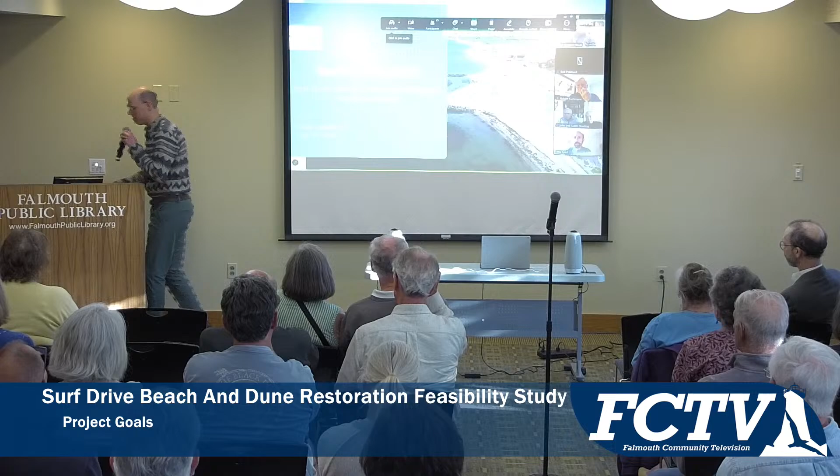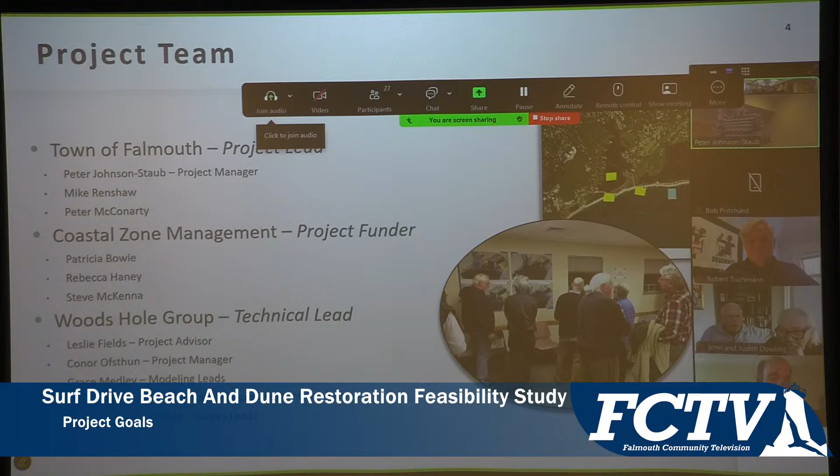I'm a coastal scientist at Woods Hole Group. We are here with the town and CZM. I will jump right into what our project team is. The Town of Falmouth is led by Peter Johnson-Staub for this project, so thank you for meeting with us regularly every other week for the past 8 months. We're also joined by Mike Renshaw, Town Manager, Peter McConarty of DPW, Josh Wrigley, Coastal Resiliency Specialist from the town, as well as others. Our funder is the Massachusetts Office of Coastal Zone Management.

We have representation from Rebecca Haney here today, so thank you, Rebecca, for coming. At the end of the presentation, you can direct questions to the whole of the project team if you like, but I'll take the first of it. And then with Woods Hole Group, I'm Conor Ofsthun, the project manager. I'm joined here by Leslie Fields, the project advisor. We might have a couple other staff coming in and out.

So this is the Surf Drive Beach and Dune Nourishment Feasibility Study. What is beach and dune nourishment? Beach nourishment is bringing in sand, gravel, sometimes cobble, just bringing sediment to the beach to build its volume, to build it wider, to build it higher, to improve the habitat, to improve the protection that it might bring in the face of storms. The same essentially goes for dune restoration.

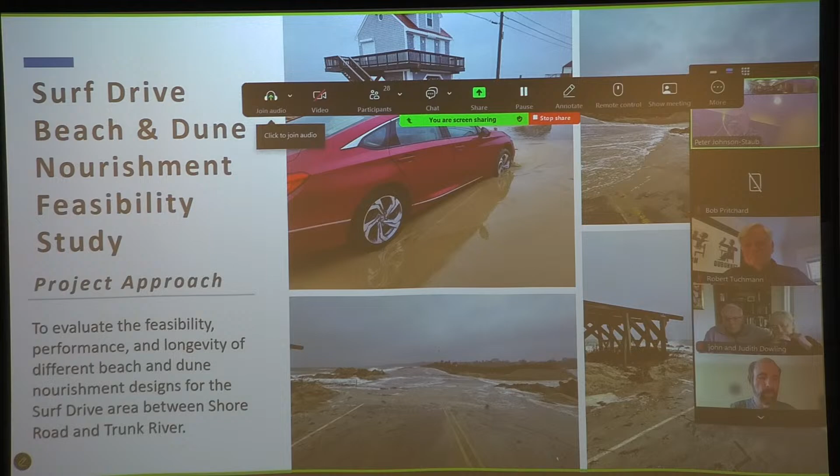Dune restoration is bringing in sediment compatible with dunes to build slopes, to attain certain crest elevations that can build a dune that both provides the habitat that a dune can provide, but also provides the storm buffer that it can provide to assets on the landward side, in this case, Surf Drive. So we're looking at beach and dune nourishment and evaluating its feasibility. What that means is we're going to evaluate, can we build this?

We're looking at all of the different constraints of the site, the topography, the wetlands, the eelgrass, the flood risk. We're also looking at the performance of a design. So we've done some modeling that I'll present here. If we design a beach or dune nourishment project, can it stand up to storms of some level? What is the longevity? And then we're also looking at feasibility from the lens of engineering and permitting.

You know, what does the design look like? What do the regulators think of this? Does this pass the Wetlands Protection Act? I've also got some slides here on cost as well. So those are all the aspects of feasibility that we'll be looking at.

The intended outcomes of the project, so what we were striving for in any sort of design, are threefold. The first, why we're here, is we're trying to combat beach and dune erosion. We're trying to reduce wave overtopping. That picture there on the right-hand side was from January 2024, and it's just a perfect example of what we're trying to prevent happening to Surf Drive, or at least reduce the risk of happening.

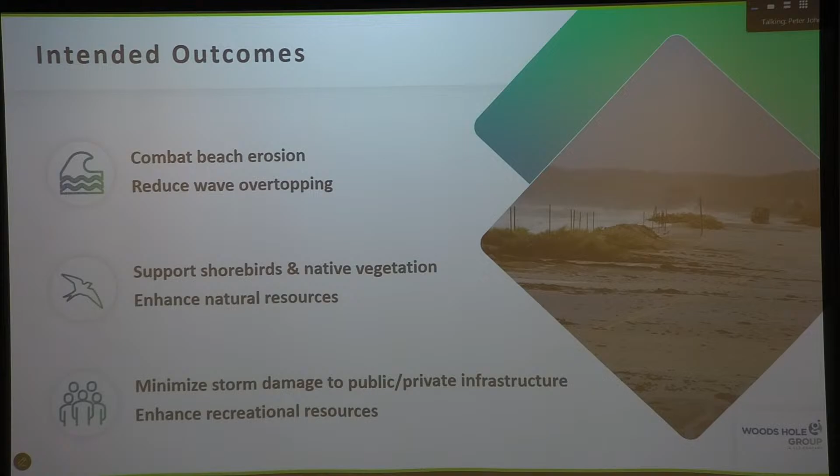So oftentimes a storm will come, it will wash over the beach, over the dunes, and carry sand into the roadway that needs to be maintained by DPW. Sometimes the roadway may be undermined.

Underneath the roadway are utilities that can become vulnerable. And there's also the loss of beach habitat and the loss of beach recreation that comes with that erosion. But additionally, we want to support shorebirds and native vegetation. There's a lot of very valuable natural resources here.

The beach and dune of Surf Drive are kind of a staple in the town of Falmouth. This is the longest part of their shoreline, and that natural resource is really important. There's also recreational resources. There's public beach, there's private beach, there's many ways for people to access this coastline. There's the roadway itself, which provides great views. So we want to understand all of those kind of mechanisms.

So I'll quickly go through kind of how we got here. Many of you may have been part of the planning processes in the past. There are a few reports. There's a climate change vulnerability assessment for the whole town of Falmouth. That climate change vulnerability assessment found Surf Drive to be especially vulnerable and especially critical to the town.

So they then did a coastal resiliency report, looking at Surf Drive and really understanding what's at risk, looking at erosion, looking at flooding, inventorying all the assets, and trying to develop, kind of from a grand scheme of things, what are we going to do? Because there are significant coastal hazards here.

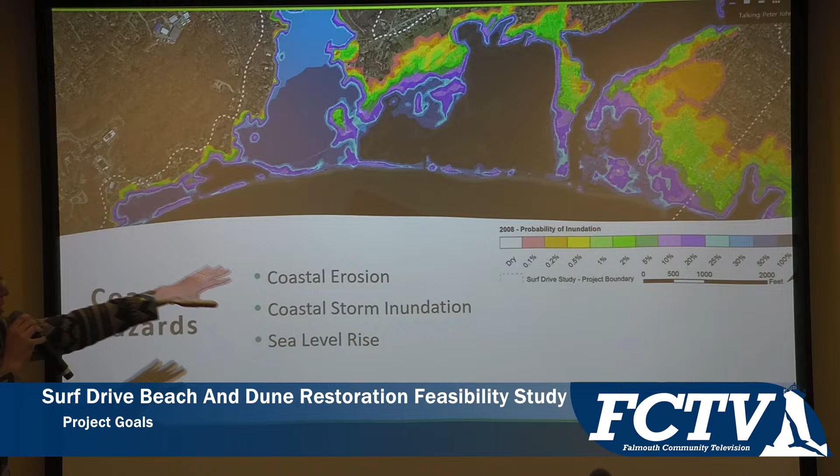This map here on the top is showing the probability of flooding on an annual basis in 2008. Since 2008, there has been some degree of sea level rise, so these are almost even old projections at this point. We have future projections as well that I'm happy to talk to. But in 2008, the road is expected to flood even once a year. Any area that is covered in dark blue has a 100% annual chance of flooding. So the condition has been severe for some time.

For decades, Falmouth has been managing their sediment, managing their roadways, and having to deal with these issues. With sea level rise, all of these issues are expected to worsen. Sea level rise is really only going in one direction, and those higher water levels are going to bring high tide flooding at some point. They're going to bring higher level storms, more surge, more overtopping of the roadway.

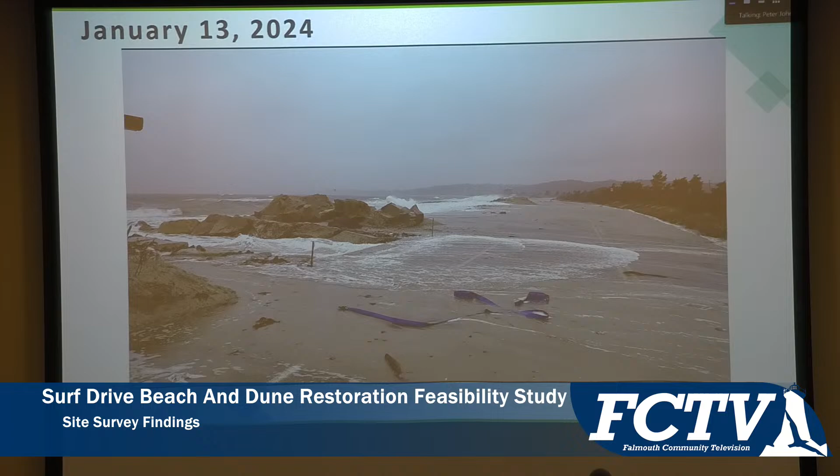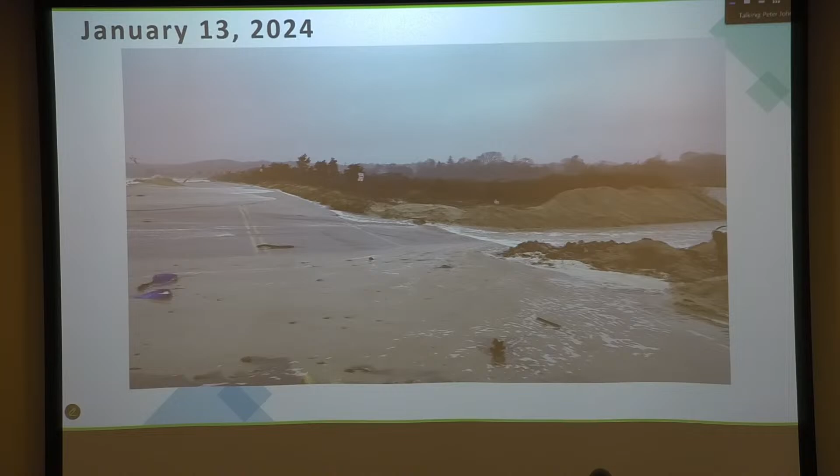So this is a video just to give a brief picture of what can happen when a storm hits Surf Drive. We're pictured here right at the edge of Salt Pond. That's the inlet there. Waves are rushing up and over the beach and flooding into Salt Pond. There's lots of sand being washed all over the place. There's some debris. And this is a storm on January 13th that, in the scheme of things, was not a very large storm.

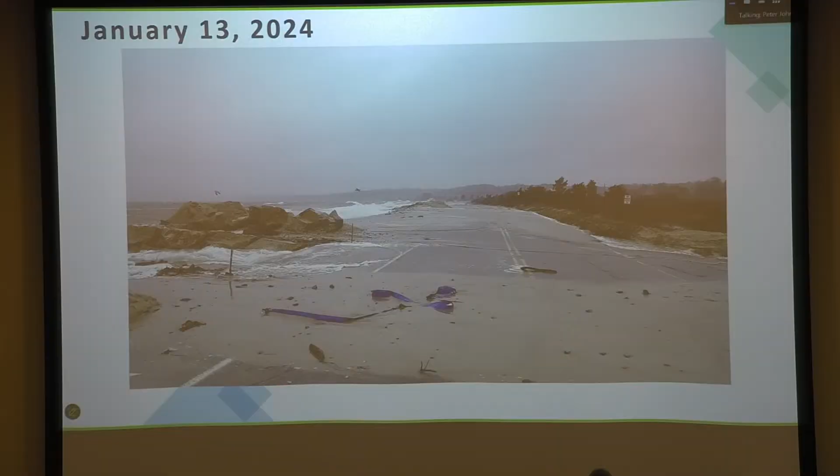So comparing that January 13th storm, the water level amounted to about a 4-year, 5-year storm. So we can expect that water level to occur every 4 or 5 years. That is January 2024, pictured on the far right there. And it amounts to about a half foot less than Hurricane Sandy, about a foot and a half less than Hurricane Bob, far less than Hurricane Carol or the 1938 hurricanes, which washed over these beaches.

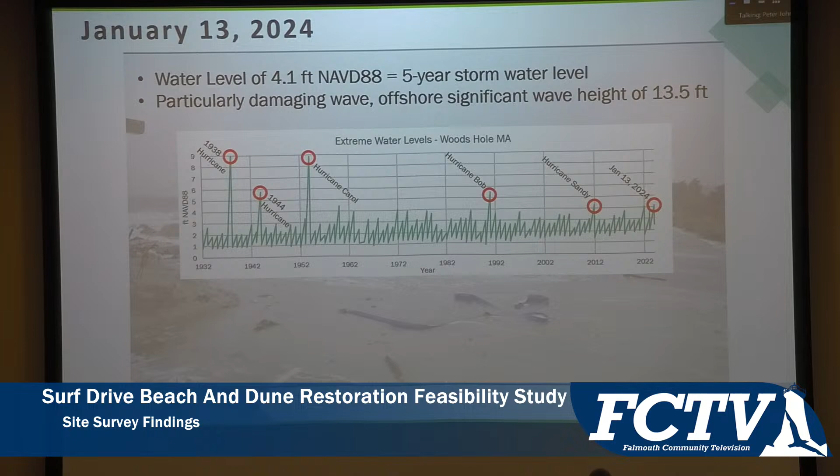This was a particularly damaging event because the significant wave height was high, especially off in Buzzards Bay and other areas. It really depends storm by storm what areas of the beach are affected, what towns get affected most. There were large waves, but they didn't coincide exactly with the high tide or the peak of the storm surge water level. So this storm could have been worse than it was, but in any case, what was a 4 to 5 year storm amounted to a significant amount of damage to the roadway.

So just quickly, those past studies that I've mentioned, there's the climate change vulnerability assessment and the coastal resiliency planning report for Surf Drive. These are all available on the town's website. Out of that came a management pathway. This is a simplified version of it here, but it's essentially saying that in the near term, the town of Falmouth, through a public outreach process, came to the conclusion that beach and dune restoration is their priority to try to do right now.

This is maybe the lowest hanging fruit, the easiest way to try to build up the barrier beach. We're working here on a barrier beach. That means we are on shifting sands at all times, and the erosion that's happening, the first fix to that is, well, we might need more sand. So beach and dune restoration is what's looked at first.

At the same time, DPW continues to maintain the roadway. Public outreach is ongoing. But in the long term, with sea level rise, it's going to become someday untenable to maintain Surf Drive. The beach itself may be able to stick around, and I'll talk a little bit more about that. But the infrastructure that's there and planting our flag at the edge of the ocean is going to be increasingly difficult to maintain.

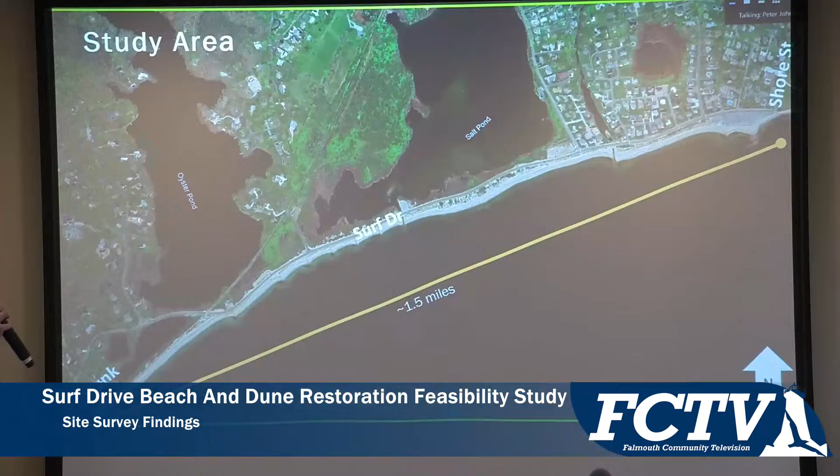I'll quickly go over just some of our survey results. So our project reach is from Trunk River in the southwest to Shore Street in the east. It's about a 1.5 mile reach. We cover the Shining Sea Bikeway to some extent, the transition to Surf Drive and Elm Road and Mills Ave, the public beach itself. So we're looking along this whole reach that has varying conditions. So we wanted to map out those varying conditions.

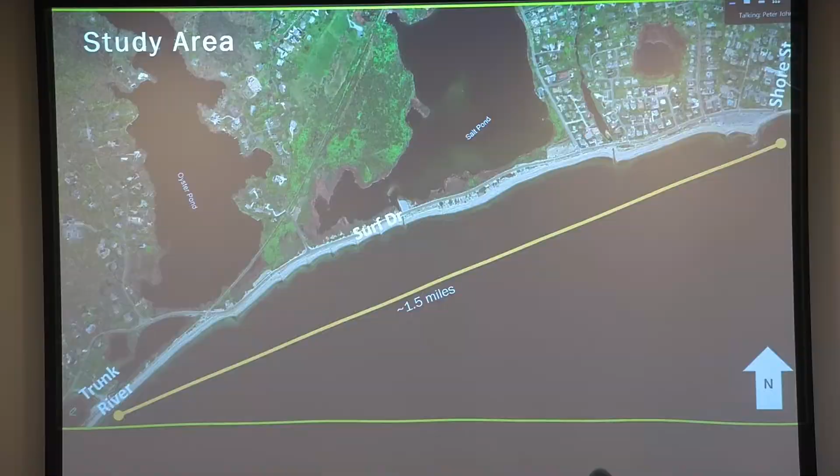We did a wetland resource delineation. We did a topographic survey. We did an eelgrass survey. We sampled sediment. We mapped all of the infrastructure, edge of road, all the buildings and jetties and so forth, all to set the baseline for analysis.

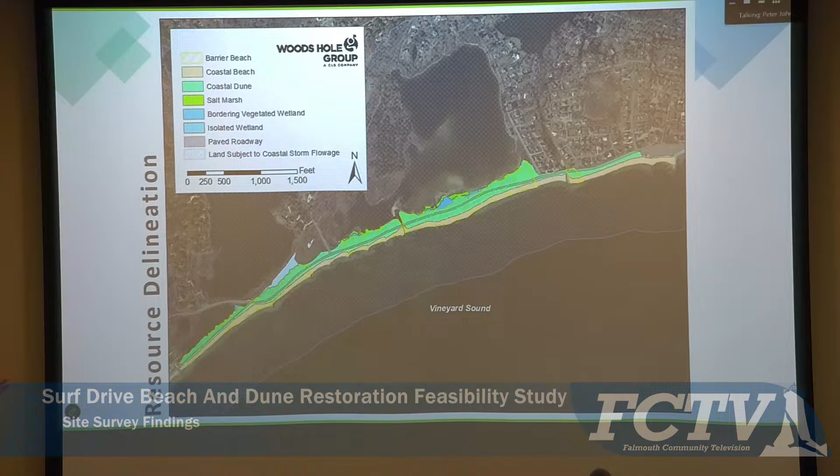Real quickly, the wetlands resource delineation came back fairly unsurprisingly as that this area is coastal beach and coastal dune. But one thing that's worth noting in this hashed area, it is a barrier beach. And I've been using that term. A barrier beach is a land bridge built by sediment. So there's no foundation to it in terms of bedrock. It's always able to shift.

This was built by uncompacted sediment, moving by waves and currents, and forming a barrier in front of inland embayments, such as Oyster Pond and Salt Pond, Fresh Pond, and Siders Pond upstream.

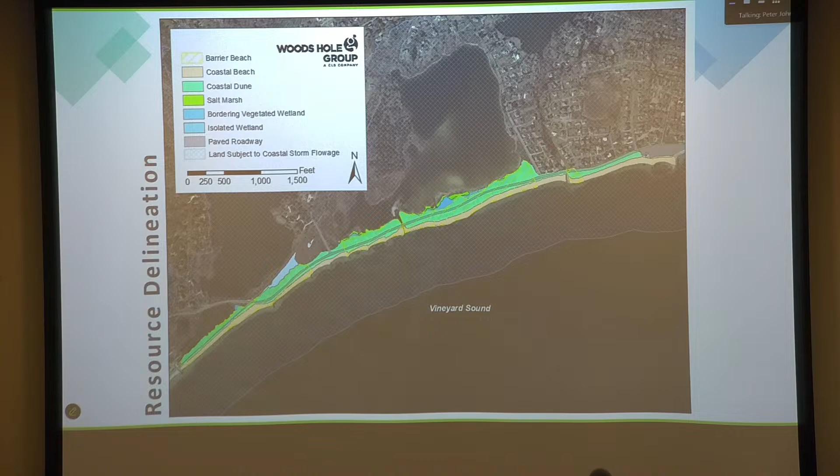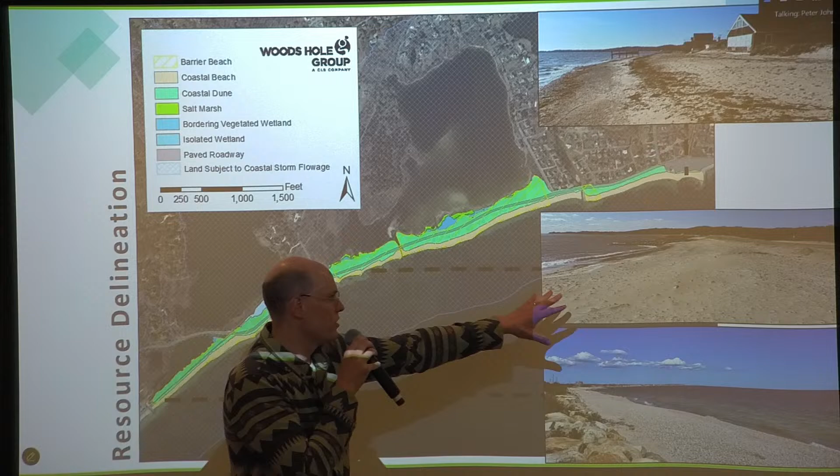Here are a few pictures of Surf Drive that you all know very well, but just to say that the conditions change from reach to reach. On the southwest side, we have Trunk River. That's backed in some cases by a revetment. The beach itself is a bit coarser. There can be gravel and cobble. As we move up the coastline to the area of Elm Road or Moores Beach, the beach is very low and narrow. There exists a small dune at the back, upper beach, and the roadway is incredibly low.

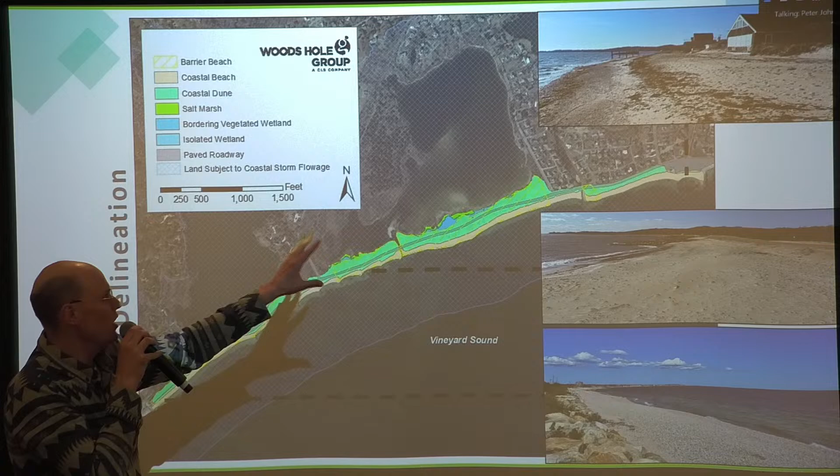Then moving further east to the public beach area, we have the Mitchell Bathhouse. We have a bit of a wider beach in certain areas, like the cottages are actually one of the more stable of the reaches here. And we have some existing dunes that are providing a level of protection.

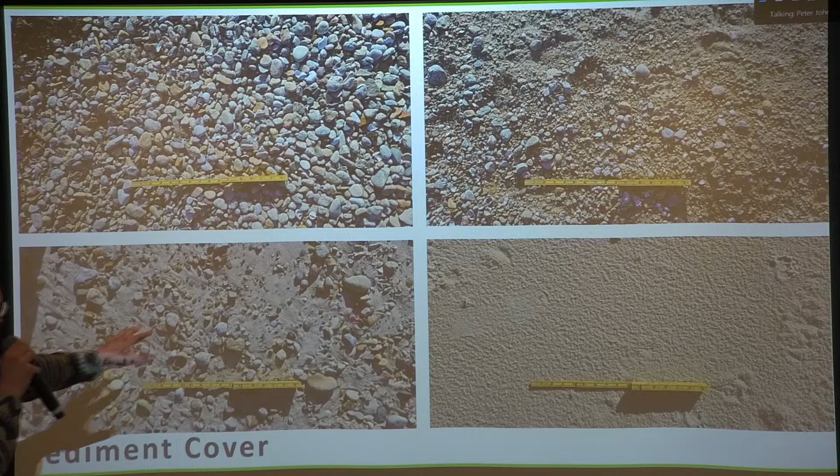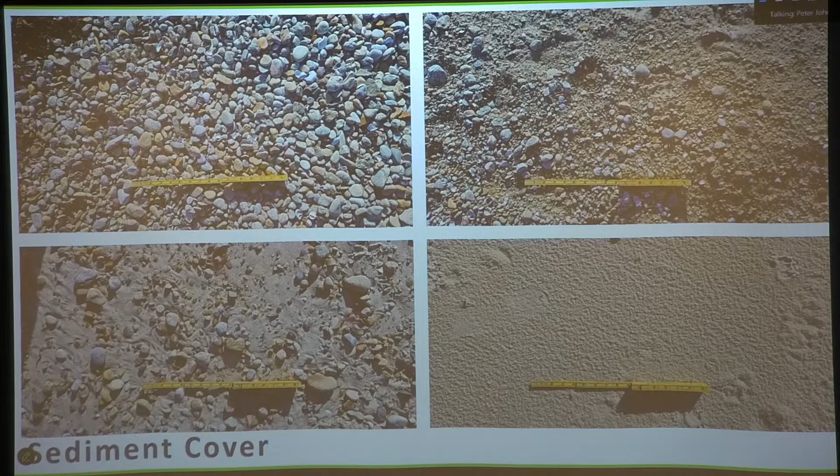Then we have mixed grain sediment. As we move east, then more sand mixed among a few cobbles and shells, and then some patches of the beach are pure sand. So all of this was sampled and is taken into account as we talk to regulators and perform our modeling and design potential adaptation strategies.

One last thing to note about the existing conditions are the amount of assets and infrastructure along Surf Drive. We have the roadway itself. We have the Shining Sea Bikeway. We have a significant amount of utilities. For instance, under Surf Drive, there's a water main. Underneath the Shining Sea Bikeway is a sewer main.

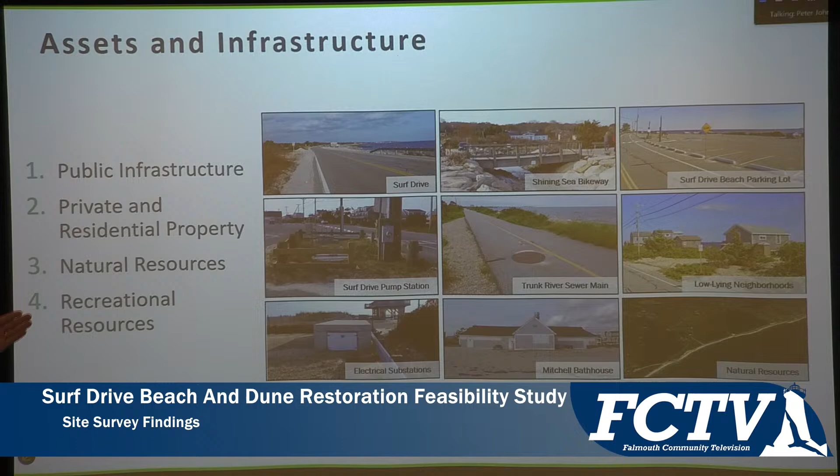There are private cottages. There are public buildings like the Mitchell Bathhouse. There are overhead utilities, electrical substations. And then, of course, there's natural resources, which bring their own value.

So what I want to start with are some of the constraints that we ran into as we were thinking about designing a beach and dune restoration project. One of the most significant ones is the existing topography. And it doesn't take a survey to know that Surf Drive is very low lying. But now we know exactly how low it is lying. And the lowest points are about 5 feet NAVD, maybe 5 to 6 feet NAVD, which means they're about 5 feet above mean sea level, maybe 3 to 4 feet above the high tide line.

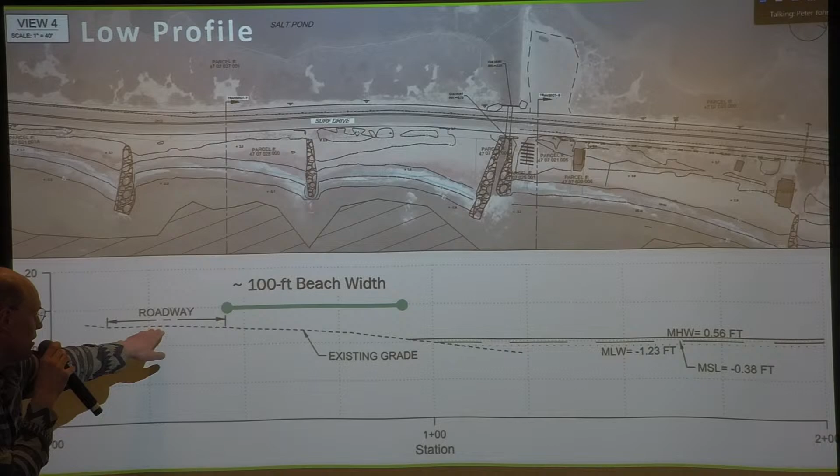The beach between the ocean and that low Surf Drive, in many cases, is very narrow. This transect here is showing just west of Salt Pond Inlet, a transect where the roadway is at about 5 or 6 feet NAVD, and the beach essentially just slopes directly grading down from the edge of road and into the ocean. It's a very flat beach. There's very little volume. There used to be, in some cases, more dune here, but they've eroded over time.

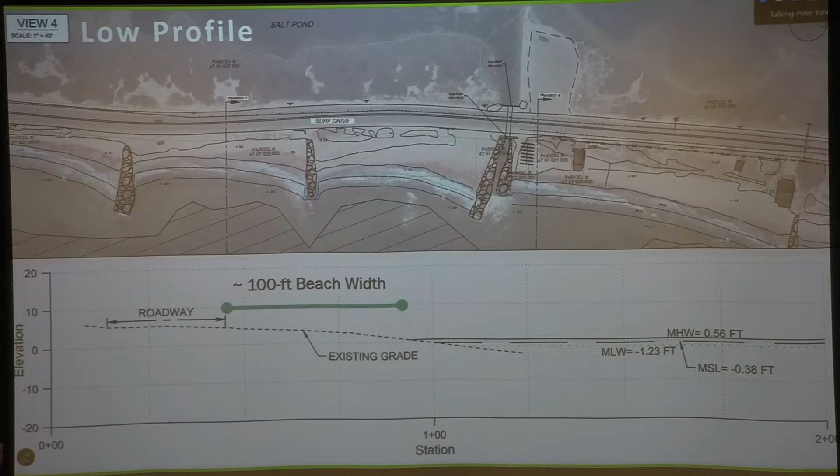So as we look to design a beach or dune nourishment project, we're really limited by the amount of beach width, dunes specifically. A dune performs best when there's a big, wide, dry beach in front of it. Dunes are really only meant to engage with the ocean during those peak storm events. But here, if there is a dune placed on the back of this beach, it's going to be so close to the ocean that it is washed and engaging with the water, even during low-level storms.

Another constraint to be aware of is protected species. So I'm sure many people are well aware of the piping plover population, the least tern population. These are both protected shorebird species along Surf Drive. They may even be, I should know this actually, we're going to talk to Mass Audubon and find out what they're doing right now. I was just in Westport the other day and there's a piping plover nest sitting on their beach. Right now, they're forming new nests.

Thank you, Peter. So piping plovers are there annually. Least terns are there annually. The number of nests, the number of mating pairs changes from year to year, but there's a consistent presence. And their locations of nesting can shift as well.

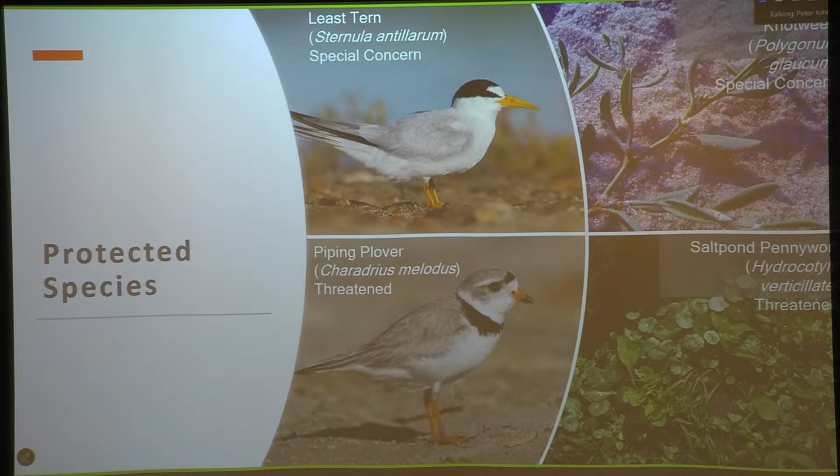Secondly, and something that was a bit more new to us, was the identification of rare plant species that exist typically in overwash areas. So there is the salt pond pennywort and the sea beach knotweed. These species are all vulnerable to a potential engineering project. So while coastal habitats like beach and dune are critical for their function, the process of construction and the design of a project can be negative to them and to them thriving.

So piping plovers, for instance, require a wide, flat beach. They also require certain types of sediment and tend to nest in certain types of sediment, sometimes a little bit more coarse. But if the beach is too steep, or if the dune itself is scarped, those piping plovers cannot get up above the high tide line. They don't have as much space to roam. They might not find a place that they consider safe for nesting. The protected plant species as well. A beach and dune nourishment project could potentially smother them, and that could be a taking, or it could require mitigation.

The last constraint that I want to mention is eelgrass, and this one comes as a double-edged sword. So eelgrass is very prolific off of Surf Drive, and that's unique to Surf Drive. So again, referencing Westport, just because I was there this weekend, they don't have any eelgrass essentially mapped off of their beach, and their beaches are eroding quickly, especially one called East Beach. Surf Drive has enjoyed relative stability over the years. There is erosion, there's volume loss that I've already mentioned. The dunes that are there are not very robust, but there's some areas that have enjoyed some stability.

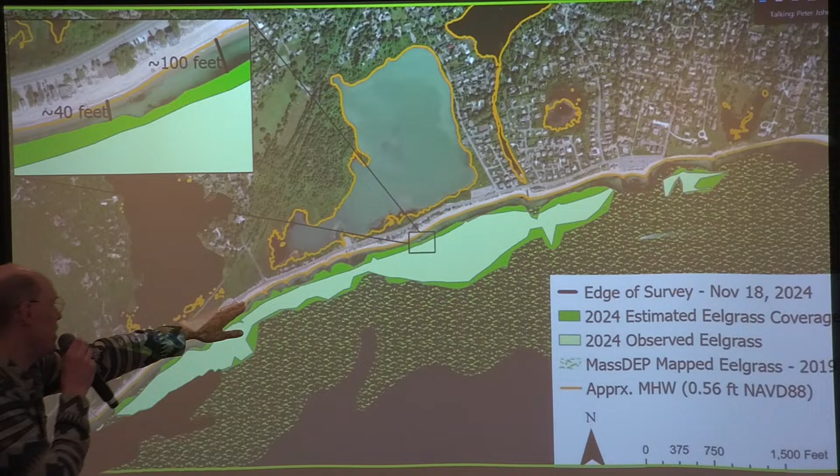One is the area near the cottages. You can see that there's a slight bend out towards the ocean where that beach is a bit wider. And that can be a result of eelgrass. The rooting system of eelgrass tends to hold sediment in place. It helps to reduce and become friction for wave energy and can help protect Surf Drive.

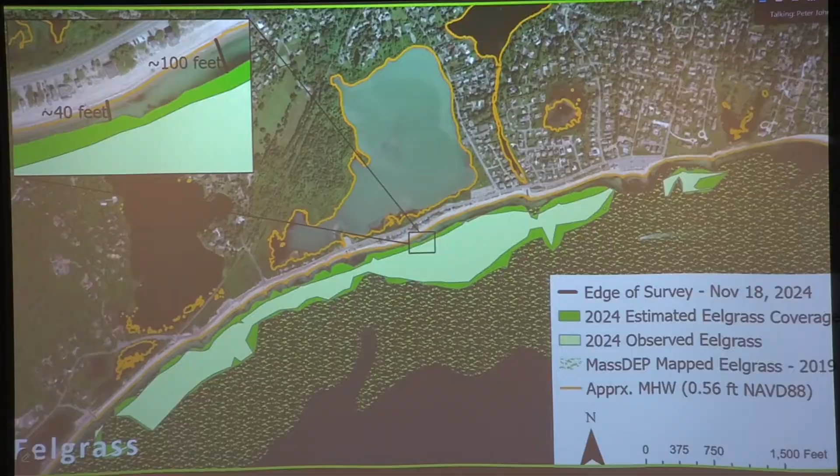But also, because the eelgrass is there, eelgrass is a protected habitat. It's essential fish habitat. And the Massachusetts Department of Marine Fisheries protects that habitat. They don't allow beach nourishment, which would smother it. If you smothered it with sand, it would die out and it may not grow back, or it may take years. So Massachusetts Department of Marine Fisheries wants a buffer between any engineering project and its eelgrass. Now, oftentimes that may not be a concern, but here the eelgrass comes up very near the shore.

We were out surveying in a boat. We had a video camera under the water, thanks to the harbor master who lent us that boat. But we couldn't even get inshore enough to map all of the eelgrass, so we had to go back on foot and wade out into the water to find and map where the edge of eelgrass was. So in some cases, it was as near as even 40 feet from the high tide line.

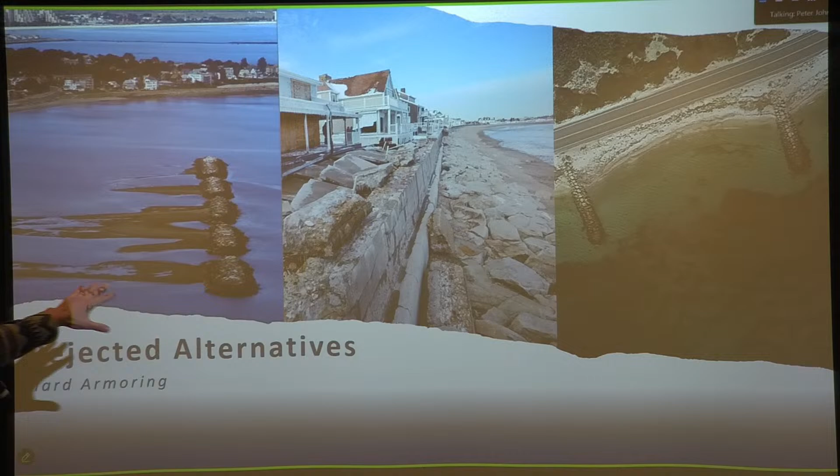Another thing to mention is that hard armoring is rejected from consideration in this project. Now, that was coming out of the town's planning projects. Beach and dune nourishment were identified as the primary first response to issues of vulnerability along Surf Drive. But there are other reasons to reject hard armoring from a solution. Here we're looking at breakwaters. This is a seawall, and these are groins.

Seawalls in particular are a very appealing solution. You know, we look at Surf Drive and we say, hey, Surf Drive is being undermined. It's being washed over by waves. Can't we just put a wall there and hold it where it is? And that sounds like the right solution, but there are negative cascading effects of a seawall. Seawalls can cause reflection of waves. And while that reflection of waves is moving away from Surf Drive, it then is driven into the ground right at the beach at its toe. So there's significant erosion right at the toe of all seawalls, unless there's scour protection that's built in.

But again, there are beaches that essentially erode and drop in elevation. You're trying to protect what's landward of the seawall, but anything seaward is just given up on. So the beaches of Surf Drive, if a seawall were constructed, would essentially be lost in time. Once that beach is lost, you've now dropped your elevation in front of the toe of the seawall, and now waves, instead of breaking on sandbars or breaking on the beach, are now breaking right on your seawall. And so that wave forcing is able to cause damage, to overtop, and cause flooding still that you had tried to avoid in the first place.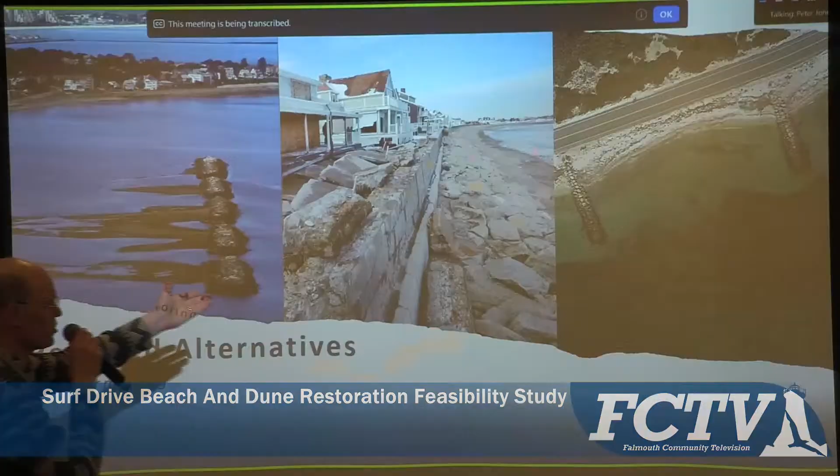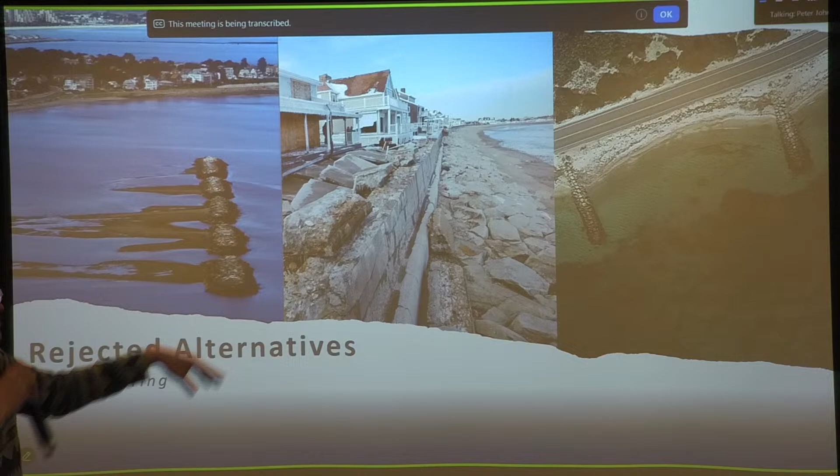So this picture along Marshfield is showing a seawall that's crumbling in the face of storm waves and nor'easters. The sidewalk and the patios are buckling, the seawall itself is crumbling, and the beach is barely there, even at a low tide.

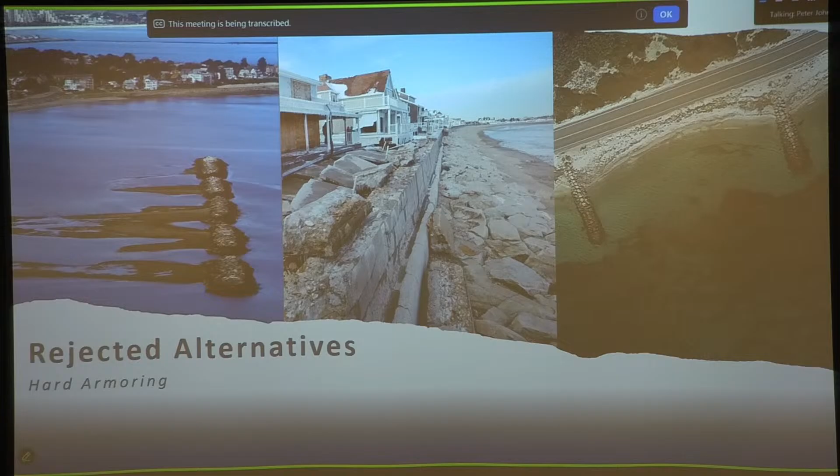Another consideration is breakwaters. So why aren't we considering breakwaters here? Breakwaters are intended to break wave energy. They're intended to deposit sediment on their landward side. But breakwaters don't have any effect on the storm surge water level. They don't have any effect on sea level rise. So that map that I showed you earlier about flooding and an annual chance of flooding on Surf Drive, that stands regardless of if a breakwater is built. These breakwaters could break wave energy, but the long-term prospect of Surf Drive is flooding because the elevation is low.

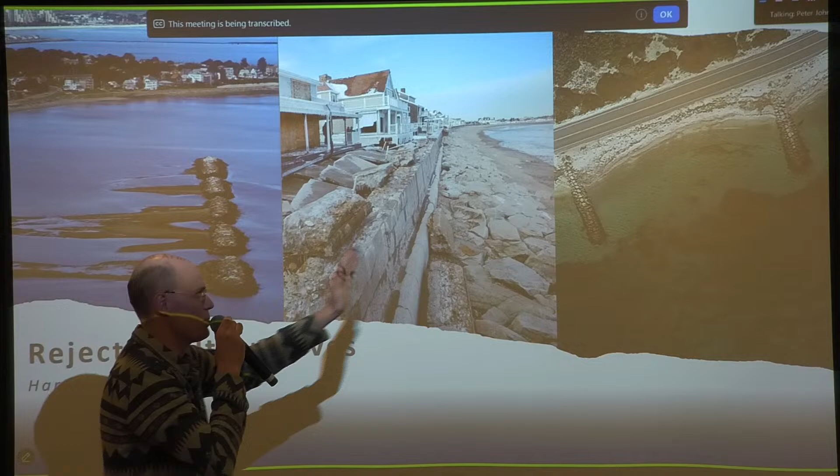Lastly, I do have groins pictured here. I don't want to spend too much time on this, but these groins are pictured on Surf Drive. There are already groins there. Those are intended to capture the longshore transport of sediment. And this picture is just to demonstrate that despite the presence of hard armoring, despite the presence of groins, the beaches are still very narrow.

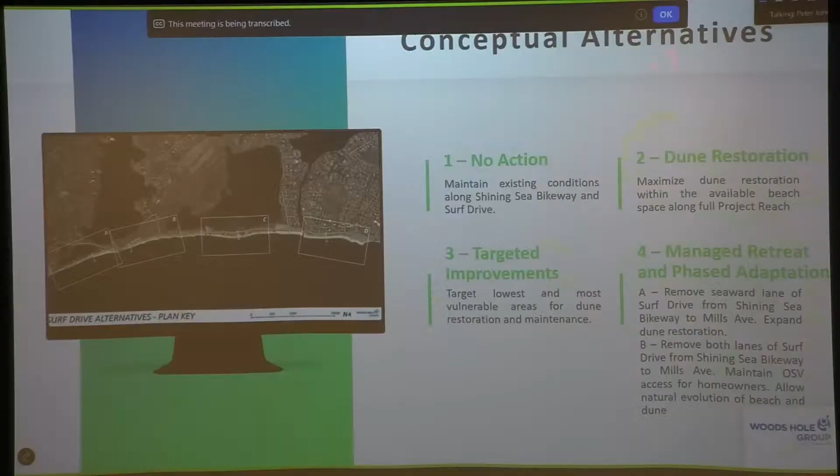Okay, so moving on to some more hopeful news though, I want to talk about opportunities for restoration. Now, we looked at all these constraints and existing conditions and then started to think of what are our conceptual engineering solutions. First, we're looking at no action. We always want to look at no action because it's a major investment to go out and do something. And we want to try to have a baseline to compare against.

Secondly, we are looking at dune restoration, attempting to maximize as much sand as we can get into the system as possible without impacting the roadway, without impacting the resources. How much sand can we put at that upper beach to build elevation, to build volume? Again, what Surf Drive needs, what a barrier beach needs, is sand to be able to withstand the brunt of storm waves.

Third, we're looking at targeted improvements, more of a management technique than an engineering technique. It's essentially taking alternative 2 and placing it where the vulnerability is greatest. So instead of nourishing or restoring the dunes along the 1.5-mile stretch, well, there are some areas that are more vulnerable than others, some areas that are lacking dune more than others. So to maximize the benefit of the town's resources, maybe we restore dunes only in those certain places.

The fourth alternative is a managed retreat and phased adaptation approach. When I say phased adaptation, that means we're not saying abandon Surf Drive outright, rip the Band-Aid off all at once.

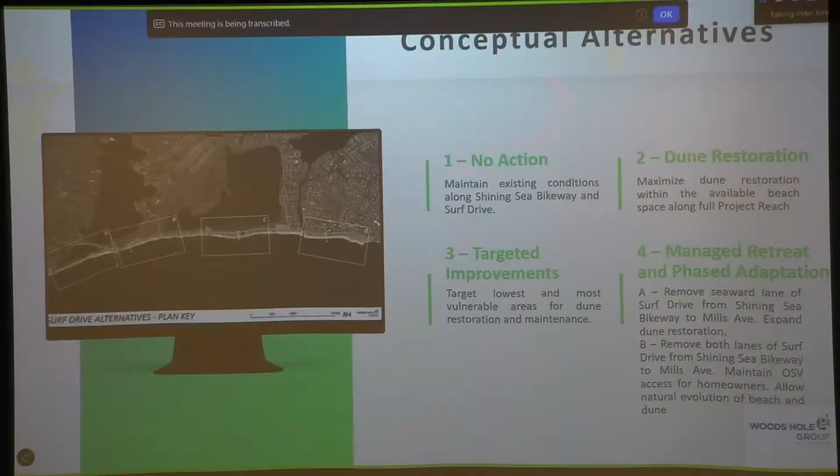There need to be steps to that. One of those steps could be letter A there, removing the seaward lane of Surf Drive. If you remove the seaward lane of Surf Drive, you create more space, more beach space to build a dune. So in that 4A, we've designed a dune that's maximized. It's as big, as wide, as tall as it can possibly be, while still meeting ecological constraints. And we modeled that to see, is there a greater benefit to doing so?

Lastly, 4B, which will come later, there is the consideration of removing both lanes of Surf Drive, converting this road to an oversand vehicle access roadway.

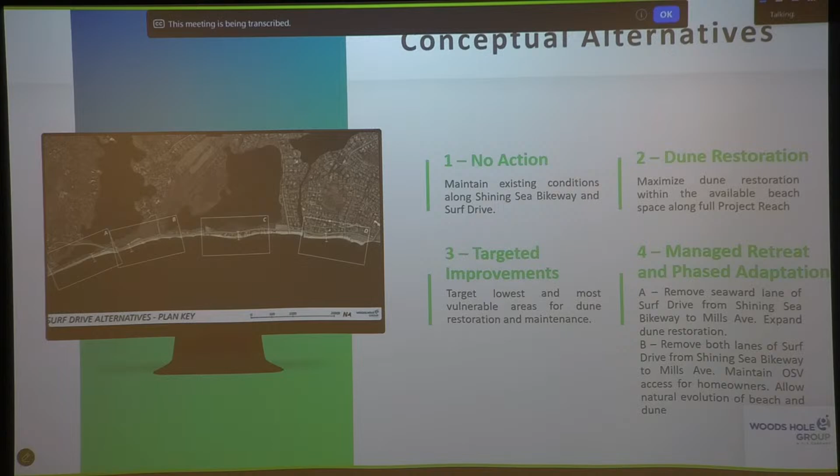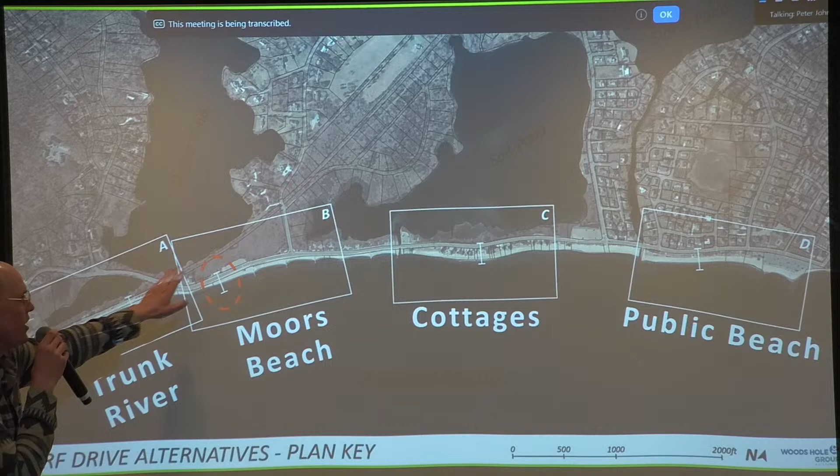All right, as I walk through engineering alternatives, we're really just going to focus, for the purposes of this presentation, on this reach B, we're calling Moors Beach. It's a long reach from the Shining Sea Bikeway to Elm Road. We do have results that will be in a public report on June 30th that show a Trunk River reach, show the cottages, show the public beach as well. But Moors Beach is really a good poster child for this because it's the lowest and the most vulnerable at the moment.

Just for the purposes of understanding all of these alternatives and with respect to the baseline, this is what it looks like today. This is the no action alternative. There's very little dune. There's some pockets of existing dune. There's some revetment where the road comes as close as possible to the edge of the water line. But again, the beach is narrow.

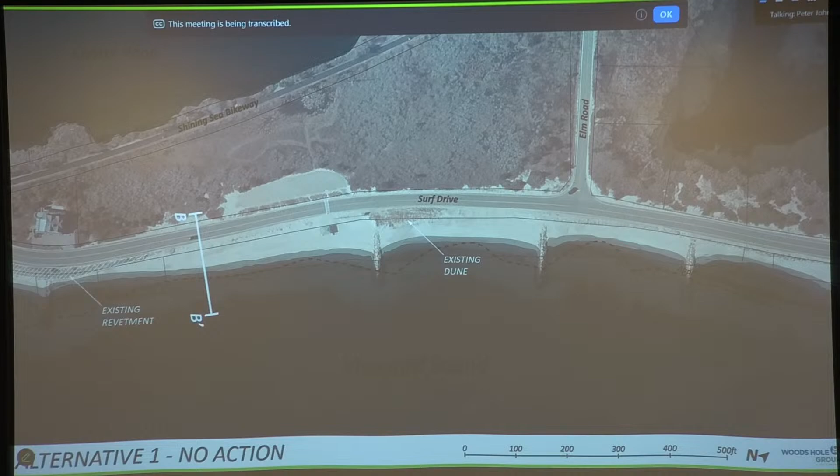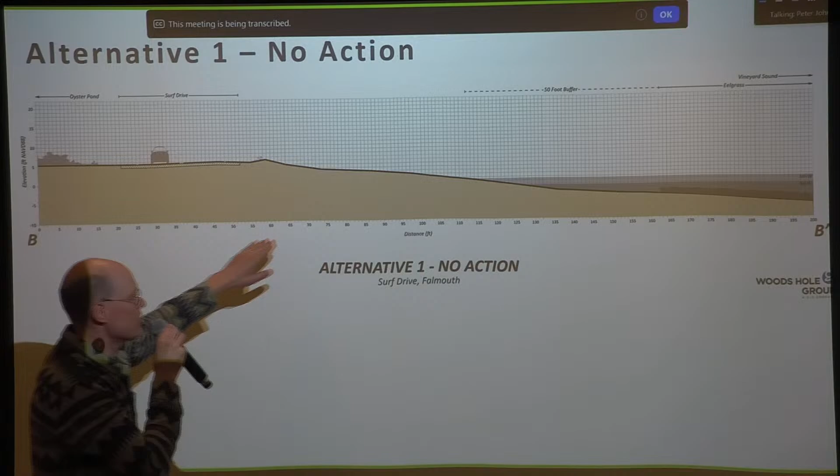This is a profile of that. So we're looking at the elevation of Surf Drive and the beach. You can see that Surf Drive is at about 5 feet NAVD. There's a little ridge of a dune. And then we have the slope down into the near shore, gently sloping. Eelgrass is offshore, about 160 feet off.

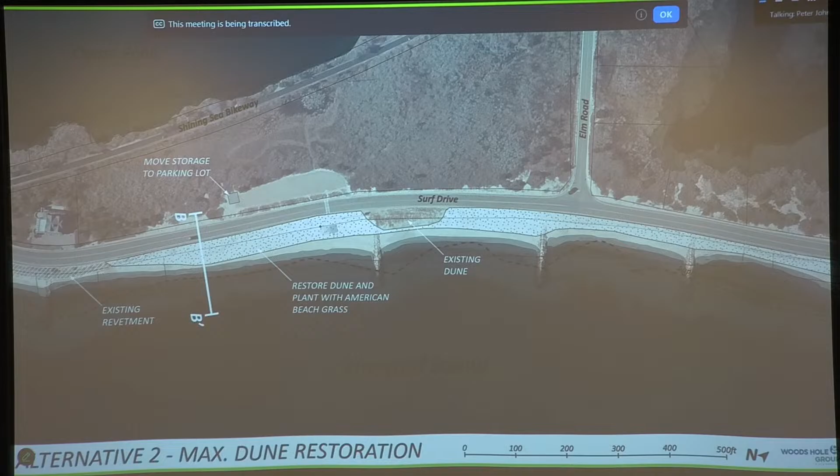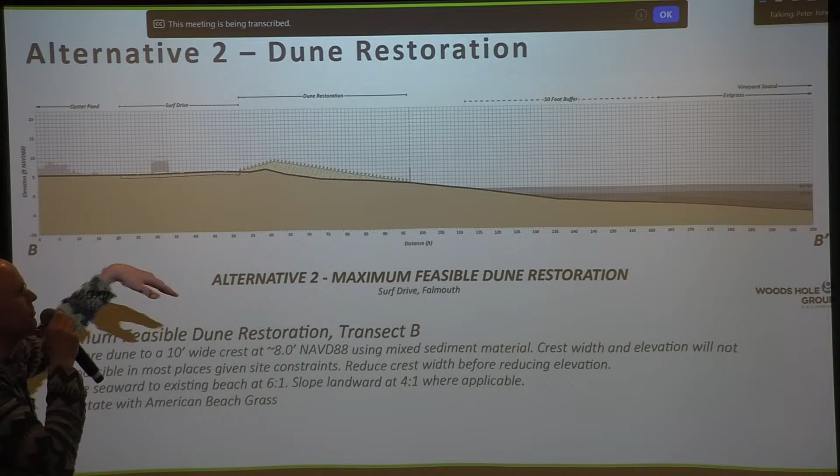And this is that in profile view. So you can see that dune over the existing condition gives us about 2 more feet of elevation. 2 feet is not too much, but as we'll see in the slides about modeling, it's better than nothing. So we would slope this dune from the edge of the roadway up to a crest elevation of 7 or 8 feet, and then we would slope it gently into the near shore and tie in with the beach.

This is alternative 3. Let me get that out the way. Okay. This is alternative 3, the targeted improvements. So that same dune design could be applied across the entire reach, as we have it in alternative 2, or it could be applied at the areas that need it most. So what those areas are: along the Trunk River reach, the revetment ends. It stops short of reaching Surf Drive. So this long gap here, about 500 feet or so, has no existing revetment. It has little protection. There is some dune that exists there, but again, it could be more.

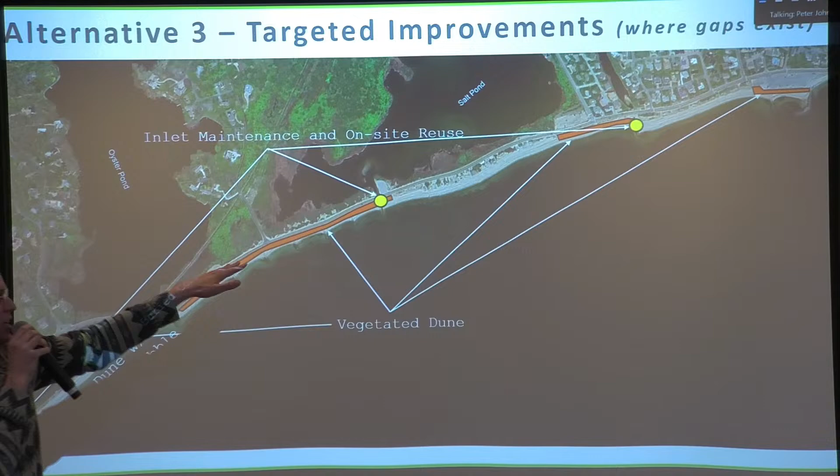So we're proposing restoring the dune there, burying even a cobble berm underneath it because that is compatible, as I said, with the sediment along Trunk River. Then we have a vegetated dune proposed along Moores Field, up to Salt Pond. The cottages are a gap in that proposed dune because that area contains existing dune. The beach is the widest. It's a bit less vulnerable. There's a gap at the base of Mills Ave where dune could be restored. The public beach has some existing dune. And then again, dune is needed in front of the parking lot and the Mitchell Bathhouse.

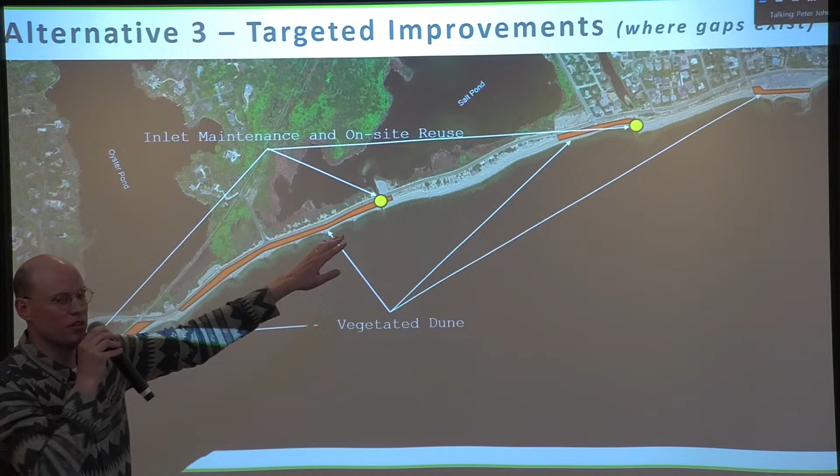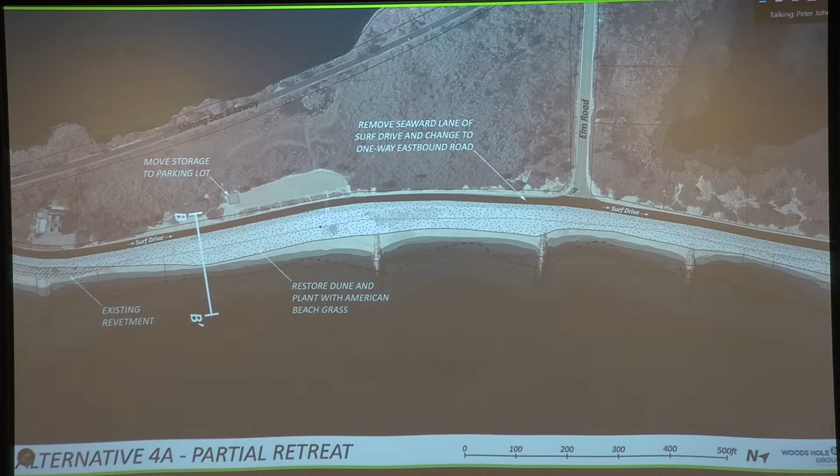So if 15 feet of Surf Drive were given up for a dune restoration project, we can now build a dune that has a bit more volume to it. And it reaches a higher elevation of about 8 or 9 feet NAVD.

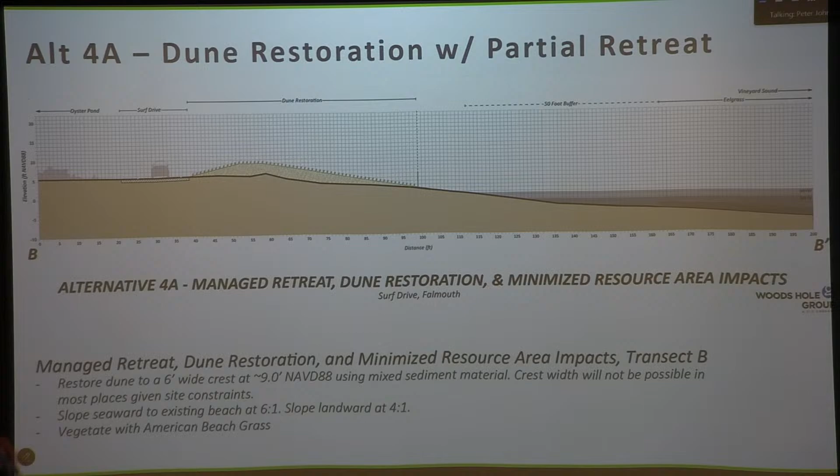All right, so now I'm going to talk a little bit about the modeling that we did here. I think it's here. Thanks, Peter.

So when I talk about modeling, what we used here was a model called XBeach. XBeach is a cross-shore model that sends waves and storm surge up the beach and down the beach. We have tidal cycles during that period. We can see the sediment moving onshore, moving offshore, and shifting with the varying energies of the waves.

I'm going to show you 3 different images stacked on top of each other here. We'll start with the existing conditions. All of these are changes to the beach profile in response to a 5-year storm. So that is a relatively low intensity storm, one that we would be expected to occur, again, every 5 years.

The 2 pieces I want you to focus on in this figure are the black line with the tan fill underneath. That's the existing profile. So we are at Transect B, we're at Moores Beach again. This is that existing profile. And the red line is the post-storm profile.

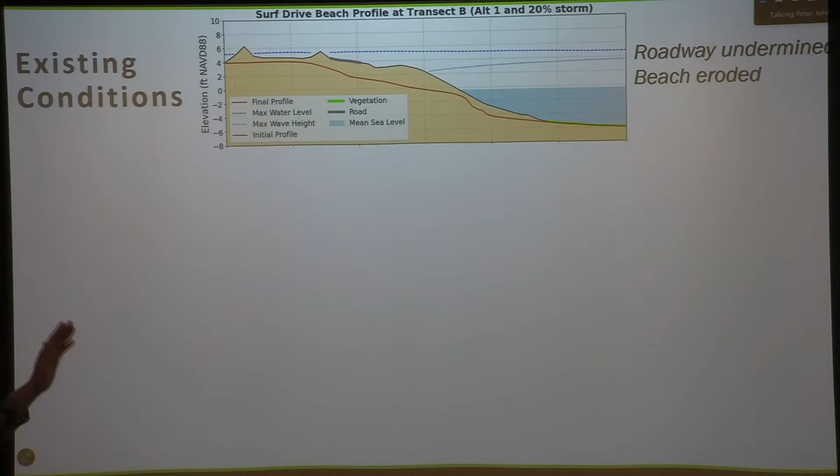So the storm has come through in this case, and it has eroded the beach. It's also eroded the roadway and undermined it. You can see that the beach has dropped by about 2 to 3 feet, and the roadway itself has dropped by about 1 to 2 feet. That sand, in this case, is mostly being pushed inland. So it's becoming overwash. Essentially, the biggest takeaways from this are a 5-year storm can very easily undermine the roadway and erode the beach.

Now, what if we built that dune restoration? We're maximizing as much sand as we can in the existing upper beach. Again, it's not a large project, but it is better than nothing. And what is the result that we have? So our black line here is the proposed profile. You can see as we compare it to the existing that there is a peak now at about 7 feet above mean sea level. And that's the crest of the dune, which then slopes down into the beach. And then we gain back the existing profile offshore.

So that is now a taller dune, more sand, and we run a 5-year storm against it. And that red line is the result. And you can compare the red lines of the upper one to the lower one and see that we do have beach erosion in both cases, but we don't have roadway undermining in the second case. The elevation of the roadway stays the same. We don't expect that there would be damage to it. So under a small-scale storm, a small-scale project can provide a benefit.

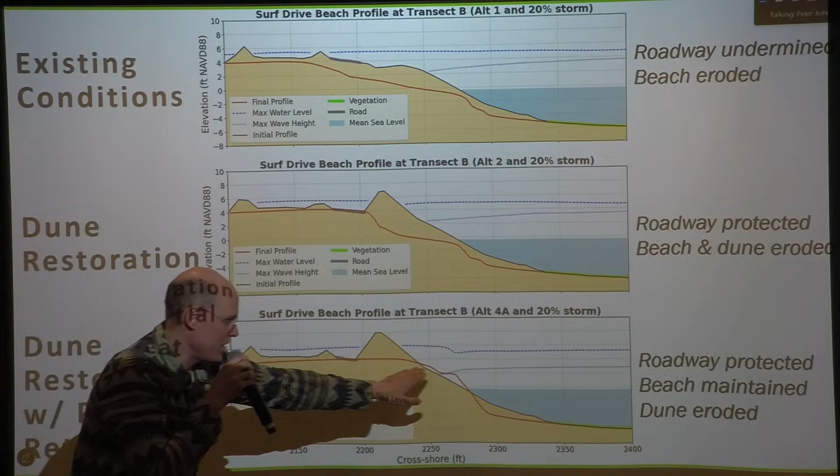Lastly, we have the alternative 4A, which is the maximized beach dune restoration project. If we give up 15 feet of Surf Drive, if we build ourselves a wider and higher dune, how much more protection is gained? So we run that same storm, a 5-year storm against it, and we can see that that dune, now bigger, is still washed away. But not all of that sand is lost. Instead of washing into Salt Pond, it's washed, in some cases, to the near shore. The beach is still maintained.

So instead of a scarp here at the edge of the roadway, we still have a wide and dry beach above high tide. So building a larger project means that you could protect your beach longer and you could protect your roadway longer. It also means, though, that any project that we build is likely to be washed out in time. These are all temporary solutions. The town can invest in re-upping their permits, reconstructing these projects, and we'll talk about cost right now.

So, we don't have a cost to alternative one. Alternative one is no action. So there's no construction cost. But there is a maintenance cost. There is a damage cost. And we're still working on calculating what that is. We're putting a value to all the assets, trying to identify when they're damaged and what that costs. And it's looking to be a high number. So the consequences of no action are one thing that we're quantifying and will be in the final report on June 30th. Now, to take action, to construct alternative 2, 3, or 4A, we have these varying costs over here.

Alternative 2 is based on importing sand, importing some cobble in the Trunk River case, grading that material with heavy equipment, and then planting beach grass across a really large acreage. That project would cost roughly $3 million.

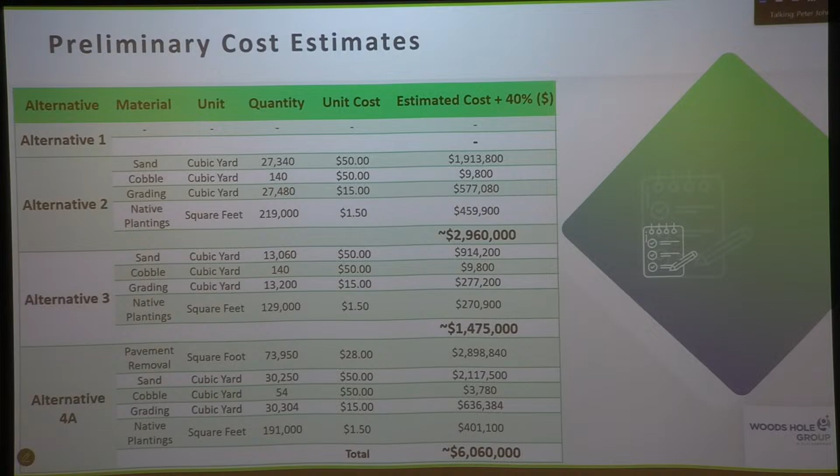So we're getting to the end of the presentation here. We'll take questions soon, but I do want to talk about the temporariness of all of these alternatives. So a 5-year storm is a relatively low-intensity storm. We also looked at a 20-year storm, having a 5% chance of occurring every year. And this is a video of that larger alternative in the face of a 20-year storm. And the storm is building up in time, and at the 45th hour or so, it peaks, and it overwashes the dune. So high water levels, high wave events will be expected to wash out whatever project we build.

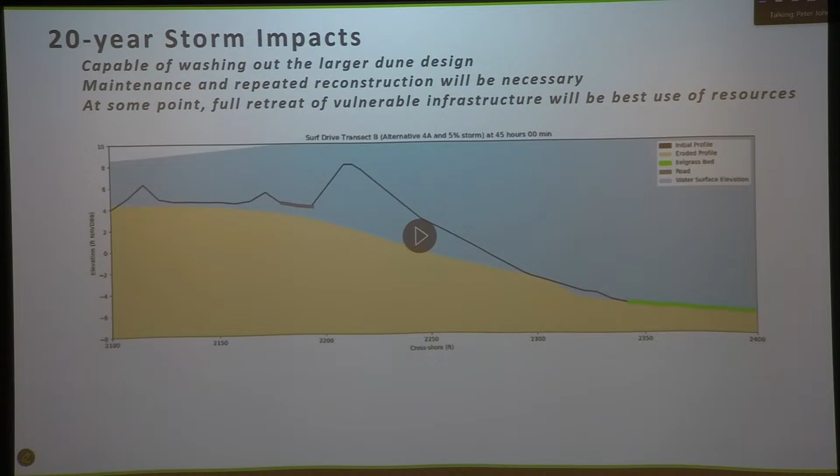We'll let it go one more time just because it moves really quickly, but you can see the sediment shifting, sometimes moving offshore. You can see the toe of the dune being scarped, and then the peak of the storm comes and overwhelms the dune. So at the end of this event, you can see that the roadway elevation has dropped by about a foot, so we expect the road to be undermined.

Understanding that any project that we can build here is temporary, we're now looking further into the alternative 4B, managed retreat alternative, and we're trying to understand what does that mean. So again, I said this earlier, the Town of Falmouth is not ripping the Band-Aid off and abandoning Surf Drive anytime soon, but the possibility of that is becoming more clear, and when that happens is a matter of what storms reach us. So if the Town of Falmouth were to begin retreating from Surf Drive, they could maintain access in the interim. The pavement could be removed, and oversand vehicle access could be maintained. This is something that has been occurring along other towns in the Massachusetts coastline.

My hometown, Scituate, Massachusetts, has a beach called Peggotty Beach, where there used to be a road on a barrier beach accessing homes that was on the seaward side of those homes. Slowly, nor'easters ate away at that beach and pushed that barrier into the wetlands. And that roadway was removed, it was put on the landward side of their homes, and then the pavement was removed, and it's just been changed to just oversand access in time.

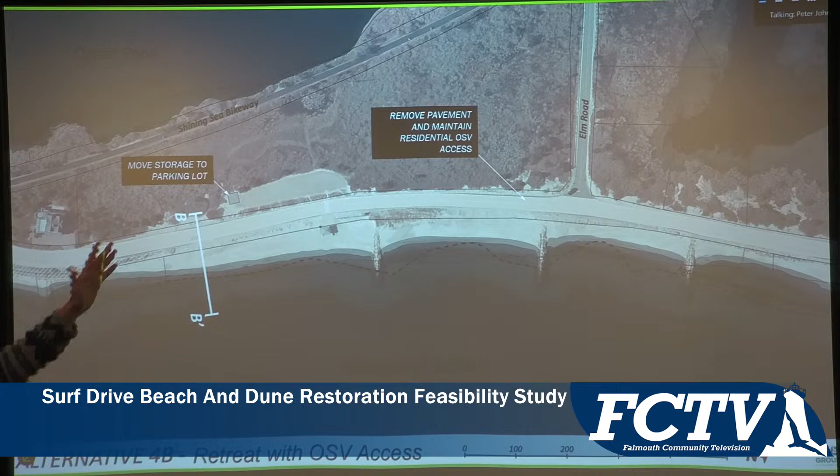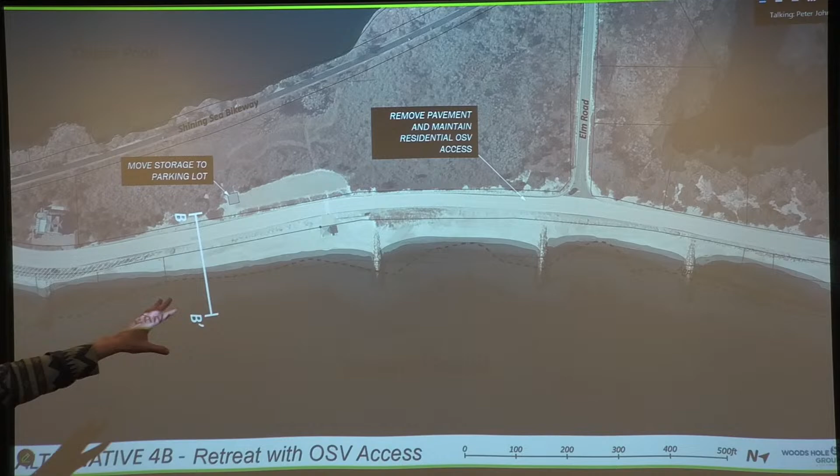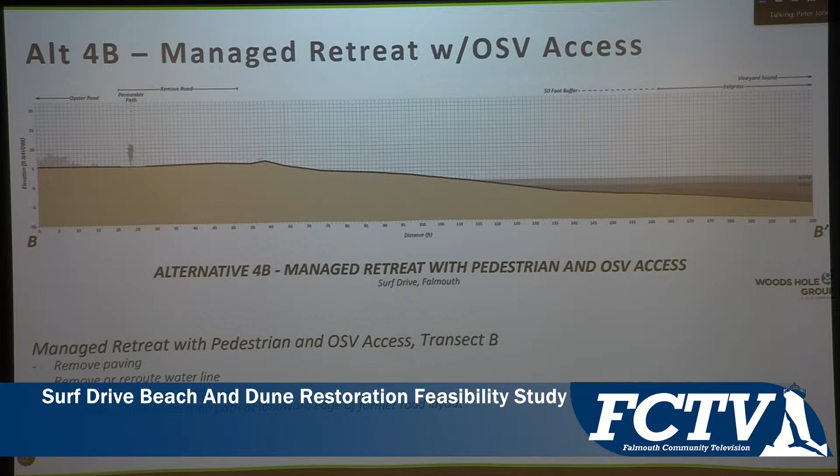So again, we understand that planning retreat is not something that we can do all at once. There are many pieces of that puzzle that need to be worked out. And really the biggest one is public outreach. We need to talk as a community about what that looks like. When does this happen? Do we want this? And how long is it sustainable to protect Surf Drive with these nature-based solutions that I presented earlier? So at some point, the town of Falmouth will look at its resources and think, Surf Drive can no longer be maintained in the face of sea level rise and storms.

There's many natural resources here that need to be managed, and there's a lot of infrastructure here that needs to be managed. So there's a lot of thought that needs to be put into the sewer main, for instance, and the water main. And we can test those processes. There can be modeling that's done as to what happens if you relocate the sewer main inland. What happens if you take away this water main? Can you reroute these things and still provide the utility services that are needed to the public?

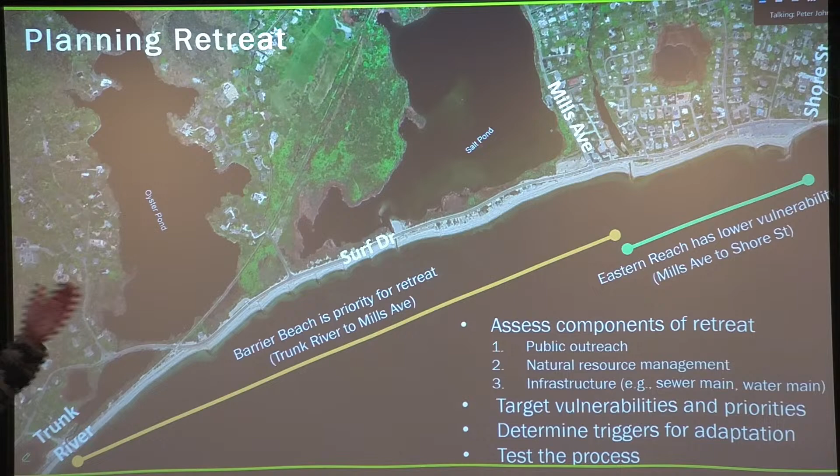And then I think one of the bigger pieces of the retreat aspect is determining the triggers for adaptation. So what does it take for the town of Falmouth to recognize that Surf Drive is no longer tenable? Is it a 5-year storm, or is it another Hurricane Bob, for instance, that comes at some point, because there's always a chance that it could. It could be long in the future, or it could be next year. What is the trigger for adaptation? It's something to think through.

All right, so that's my presentation. I'll take questions now. Thanks.

So I just wanted to remind folks that we have a tight window of opportunity to complete this study by the end of June. But as Connor mentioned, the town's not racing to any decisions. So this is obviously a weighty subject and a complicated one that the select board and the community will be talking about for quite some time.

So starting right now, we welcome your questions, and they can be directed to the Woods Hole group. We do have Rebecca Haney here from the Coastal Zone Management State Agency, and we have other staff members as well. So we do need to use the microphones because the folks at home on the FCTV and the Zoom will not be able to hear you. So if you want to go ahead and queue up at this microphone with your questions. Thank you.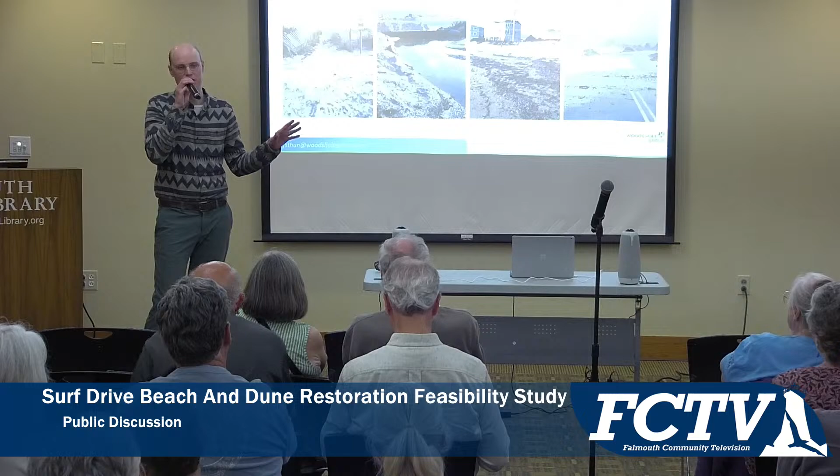Yeah, thank you. This is definitely a mixed ownership. There are probably about a couple dozen private parcels along this reach. Just before this meeting at 5 p.m. we had a property owners meeting. That was the second of two. So we are engaging directly with property owners, knowing that this will most directly affect them.

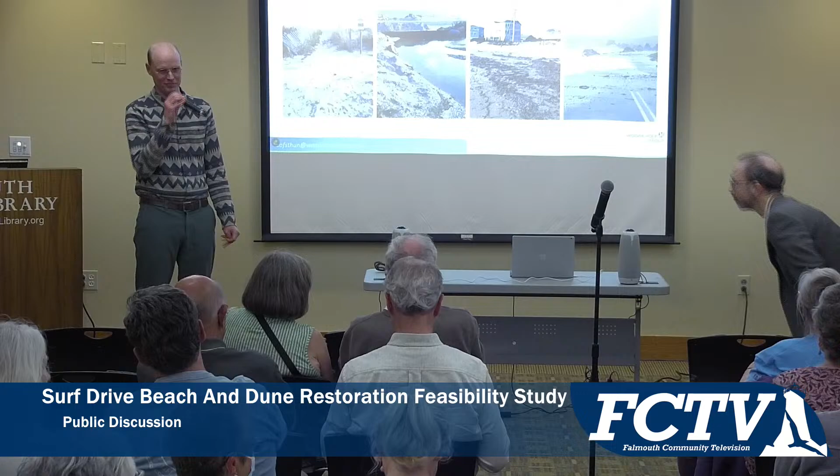I'm happy to take any question, even the most outrageous question. Any question, even the hardest, please. Oh, that's a good point.

Okay, so here's a question. How does the repair of Fresh River Culvert fit into these plans and timeline? All right, I may have to shirk this one and pass it to Peter McConerty. But yes, Fresh River Culvert, often sand is depositing in that river and needs to be dredged and maintained. That's actually a part of the targeted improvements that I didn't touch on maybe at all. So I'll go back to it for a second.

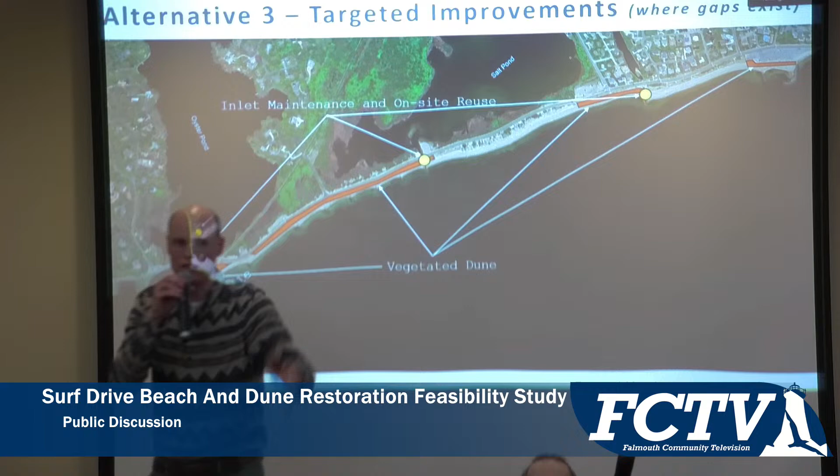There are 3 inlets to Oyster Pond. So we have Trunk River down here in the southwest. There's the inlet to Salt Pond, and then there's the inlet to Fresh River. And these are protected by long jetties, very similar to the groins in that they're meant to stop sand from moving horizontally along the beach and entering those inlets, to keep them open.

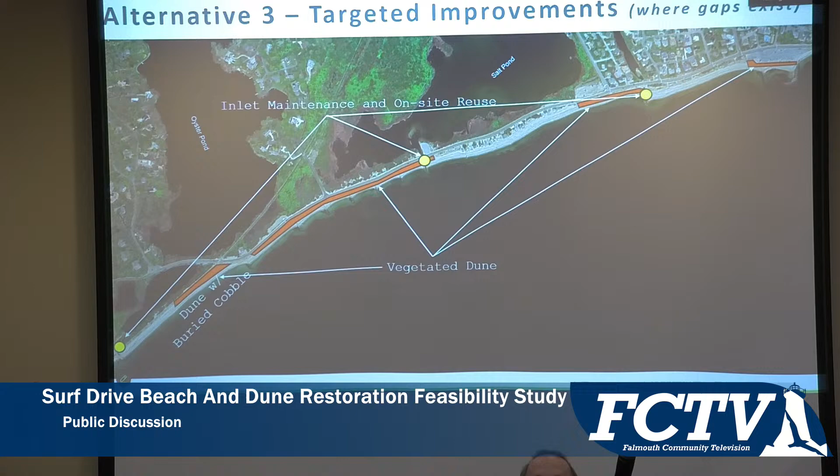But still, sand is able to get around the corner or go through the cracks and holes in the revetments in the rock themselves and fill into Salt Pond and Fresh River, and so dredging needs to take place. That sand is coming from Surf Drive. So the goal is to reuse that sediment beneficially to put on the beach, but if a dune restoration project occurs, it can be used as material to help maintain those projects and fix holes that might be developing over time. Peter, do you want to talk about the culvert?

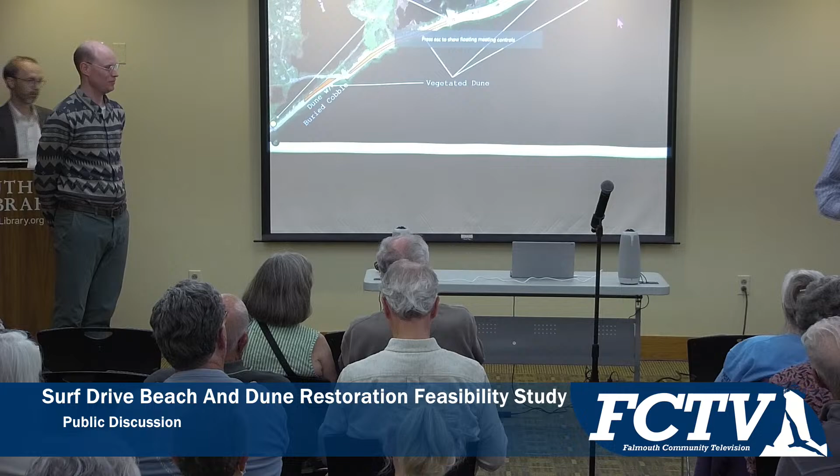Peter McConerty, Director of Public Works. As you can see, I'm very conflicted by this whole process, being Public Works and in charge of infrastructure throughout the town. But with the culverts, I did have conversations. Salt Pond, we reconstructed that last year. We are currently in the process, and Eversource contributed some funds to replace the Fresh River culvert, so we're also going to be working on that.

Those are areas that we will have to work with to have them maintained, so when the water goes into either Salt Pond or Oyster Pond or Fresh River, we'll be able to keep those pathways open so the water can come back out. So that would be part of the design of how this would all work. Obviously, right now, Public Works does maintain all 3 of those culverts. So that's something that we'd have to work with as this process moves forward.

Thank you, Peter. So another question we have from one of our Zoom viewers. Is there a way to enhance the growth of the offshore dune grass? I think they mean eelgrass, offshore dune grass, so that an enhanced root system could lessen the future impacts of storm erosion? All right, so I can take that question in both directions it could have gone.

The offshore grass is providing great stability to the beach. Even our modeling itself, we did a model with the eelgrass present and we did a model without the eelgrass present. When the eelgrass was not present, there was much more erosion. These projects did not stand up to nearly the waves that we threw at them.

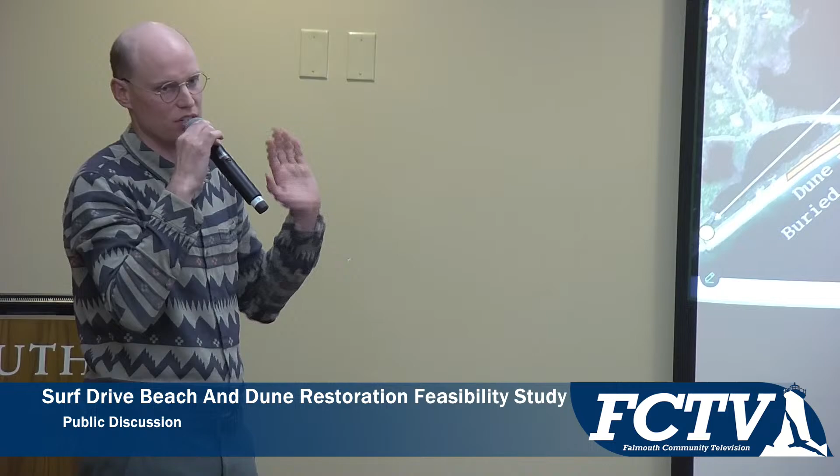And then in terms of dune grass, beach grass on the dune, works similarly. Again, it's vegetation. The root systems are helping to hold the sediments in place. And so there are practices that private landowners can do to help increase the resiliency of their properties and their beaches. Planting and protecting vegetation such as beach grass will help to stabilize your coast. It will help to reduce the energy that is rushing up over the dunes.

So we do have a couple more questions from the folks on Zoom. Would it be possible to manage a one-lane Surf Drive in a manner so that two-way traffic controlled by traffic lights could be implemented during the majority of the year, and a one-way traffic pattern could be implemented during the summer months? What other streets would absorb the increase in traffic? Peter, I think I'm going to hand that one to you.

So I think what we're talking about is removing the utilities from Surf Drive, so we wouldn't want to be installing traffic signals or putting conduits under the roadway if we're going to be looking at that. There could be options of one way at certain times, but I think one way would either be in the westerly direction or the easterly direction.

Thank you, Peter. Next question, could Surf Drive be elevated and built up with sand below? Yeah, thanks. That's a great question. Something that was looked at in the Coastal Resiliency Report is, well, why don't we just keep elevating Surf Drive above the sea level rise and the storm level? Well, the sand that is fronting it continues to be vulnerable to erosion. And so you may be able to build the roadway up on compacted earth or soil or sand, but you are only going to be increasing your risk to undermining.

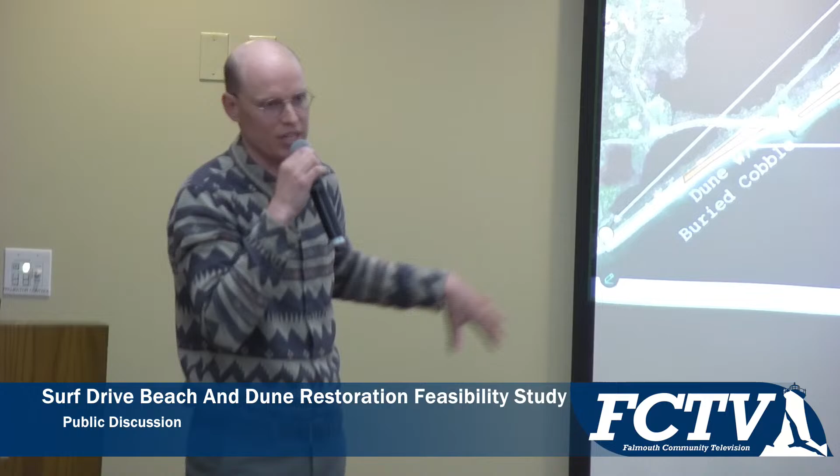Hi, I'm Mary Connolly. I live in Falmouth. Thank you so much for doing this. And I understand you're still working on this report. What is just the general timeline on when the town thinks it might come to a decision on which plan to use?

Yeah, in all honesty, we don't have a firm timeline on that. I think this will be the third study. We started with the vulnerability planning, and then the first Surf Drive study and this feasibility. So over the course of the next year, the town is going to begin to have those conversations about which of these alternatives we want to pursue, and as Connor touched on in his presentation, what the triggers are going to be for when we implement those solutions. And then, of course, a part of that planning process is what grants are available and what those grant timelines are. Those are all factors that we're going to be looking at over the course of the next year, but we do not have a predetermined timeline for implementation at this point.

Again, Eileen Gunn, East Falmouth. I have a question about this strategy. A comment, but also a question for CZM while they're here about permitting. So even if we were to make a decision tonight on an alternative, it could be at best 5 or 6 years before anything began to be constructed, by the time you get the funding, do the final design, get the permits, do the public engagement. So I have a feeling and a fear that a decision like this is going to be forced upon us sooner rather than later, and we have been studying this for a very long time.

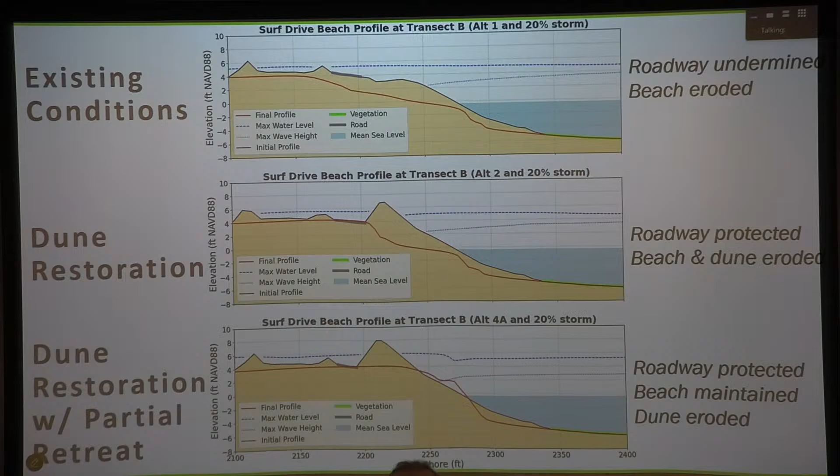Just so I understand this correctly, with any one of those alternatives, are they only going to buy us one 5-year storm? I think the way that a storm actually plays out on the coastline can really vary across the entire beach. The Trunk River is facing one direction while the public beach is facing a slightly different direction. We have groins that may disrupt wave energy or may accentuate wave energy. Each part of the beach may respond differently,

and this result is unlikely to be a blanket result for the 1.5 miles. I think this should be taken with a grain of salt, as these results are worst case. This is what could happen. It could happen at any point along the beach. But I don't think in one fell swoop, unless it were a major hurricane, that the whole of the project area is going to be washed away. Does that make sense? Or please go ahead.

And just one other question. We've been suggesting that the bathhouse needs to be relocated because of sea level rise and storms. But what you've presented here tonight goes from the Shining Sea bike path to Mill Road. So does that mean the bathhouse is safe for a 10-year storm or longer?

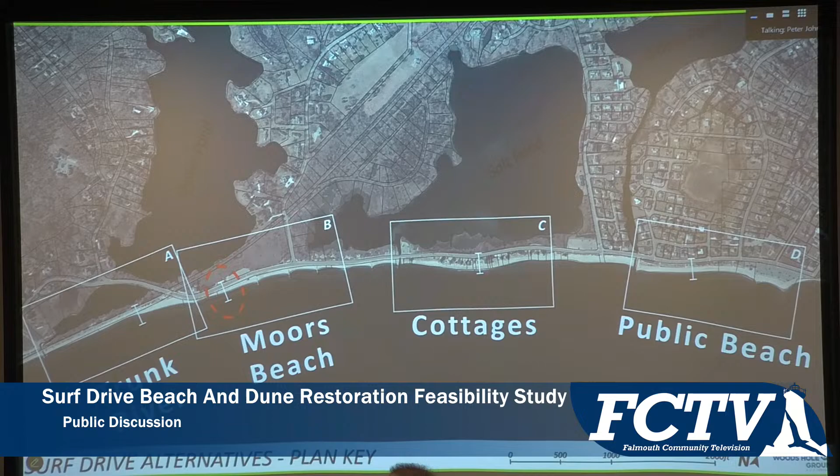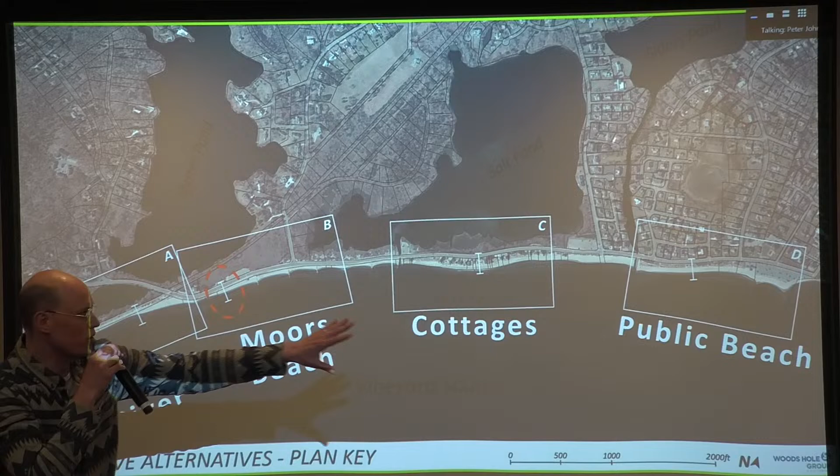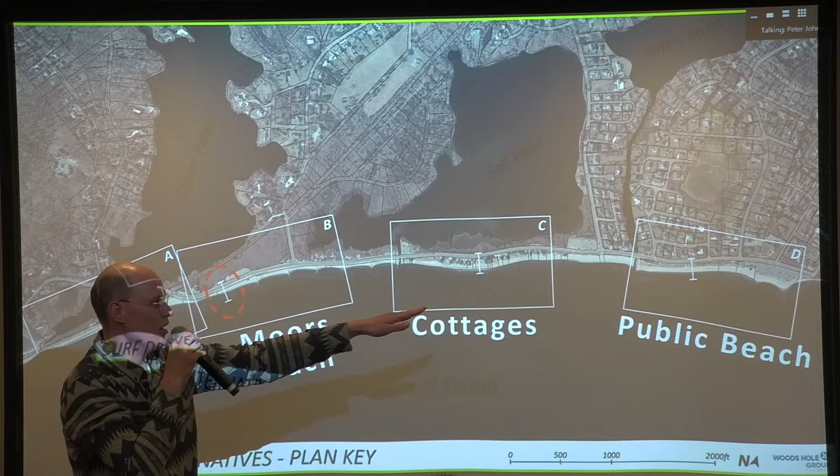Yeah, thanks. Great question. So we only focused on one reach here. Those model results are really showing this transect where the beach is narrow and the road is low. We did model 4 transects in total, so there's a modeling of reach D, which faces a different direction and experiences waves a little bit differently. We did model specifically the dune area, so the results aren't exactly applicable to the Mitchell bathhouse, but they are very helpful there. If we zoomed in, the edge of the bathhouse is essentially at the same location as the toe of the dune.

And in our modeling of transect D, that dune is getting scoured and scoured by storms. It does hold up better. I have said that the public beach is more resilient than the Moors Beach reach, but it doesn't mean that it's not at risk to erosion and doesn't need to be maintained in the long term. So Mitchell Bathhouse is very vulnerable. In the report you'll see the 2-year storm, the 5-year storm, and the 20-year storm. I can't recall exactly which one starts to undermine where we would expect the bathhouse to be, but it's at a minimum the 20-year, probably the 5-year, where it could be undermined.

Hi, Robin Sates. I'm on Leslie Street in Woods Hole. Great study. Gives us a lot of good information. I'm just curious, does this kick off a long-term project, looking at the long-term view of what Falmouth will do, because it's going to happen? Right. So you're asking, are we going to be looking at other areas of town? Other areas of town, but even just this whole area, long-term, because nature's going to win. So I'm curious what the town is doing to look beyond these very temporary solutions.

Right. So absolutely, that process, as I alluded to earlier, began with a vulnerability assessment of the whole town, and the study that preceded this one for Surf Drive looked at a wider array of solutions. So, absolutely, this is just the beginning. This is going to be an ongoing process for the remainder of this community's existence. So there's a lot more work to be done, for sure.